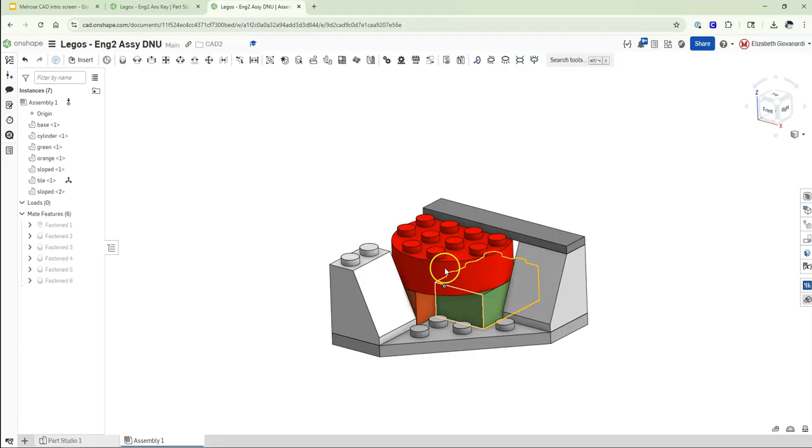Okay, so this is the first part of the video that's going to show you how to assemble your Legos, which is part of the assignment that looks like this. So this is part of the assignment from last year in CAD 1 when you had to just do the part studio of these parts and it looked like this.

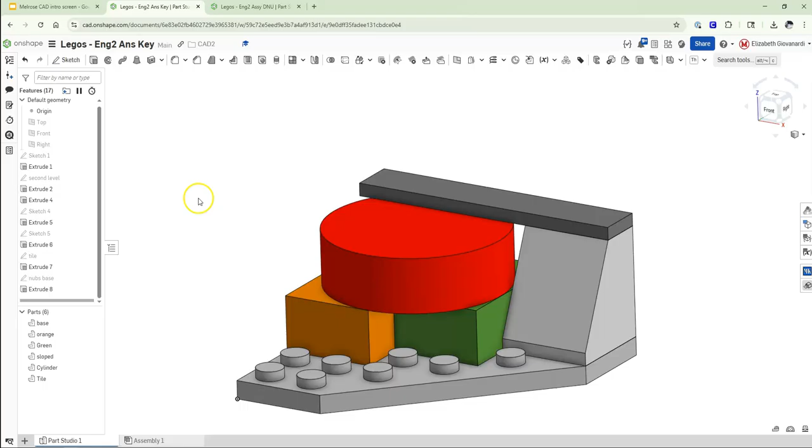And just to practice, last year you did add these studs to the top of each one of these parts, but just as a refresher, because it's been a long summer, we're going to add these studs to the top of the pieces because who wants Legos without the studs? That won't work. I'm going to turn off the parts on top just so that you can see that better.

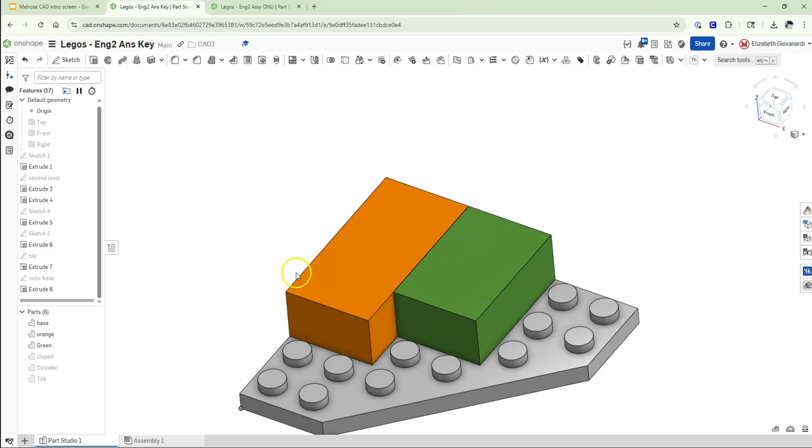All right, so the first thing we're going to want to do is create a sketch up on this top plane. So there's our sketch, and now I'm actually going to hide those two parts because what I want to do is use the use tool to bring those circles up onto my current sketch plane. So if I click, this is the use tool, and it just basically projects geometry from existing parts up onto wherever your sketch plane is.

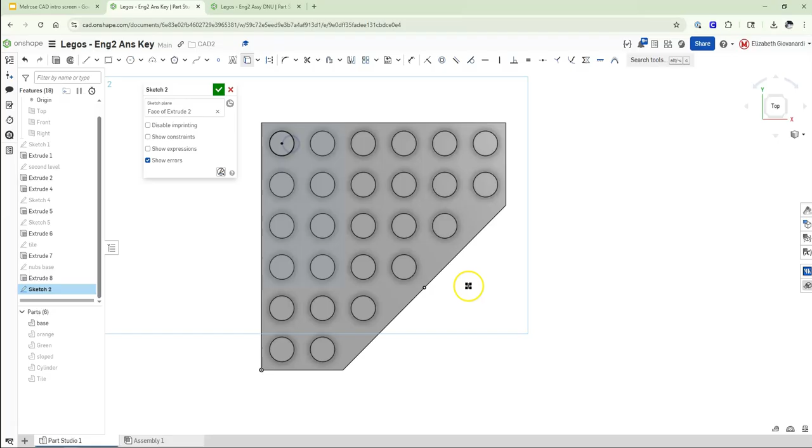So if I do that, you'll see there's now a black circle. But what I think really shows you that is when I do this. You'll see that this is now putting that circle up onto that sketch plane. So if I do it from this view, you're going to see how those get projected up onto our existing sketch plane. And I'm going to do this for every one of the circles. It's going to be on either the orange or the green piece.

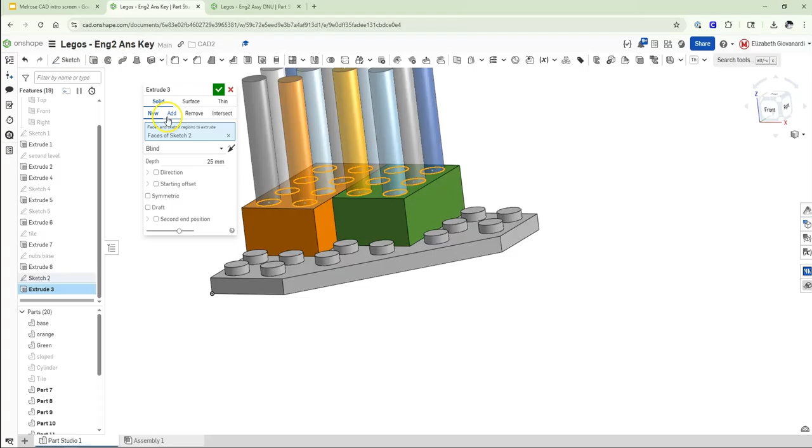And so now there's our sketch, but what I'm going to do is I'm going to turn those parts back on and now use the extrude tool, which you should remember, and I'm going to pick this whole sketch, and now I'm going to say, rather than new, because I don't want all of these to be new, I want to add those studs to the existing orange and green part.

So what I'm going to say is add, but now it's mad, right? It shows red. Anytime you see red in CAD, that means the program's mad at you. And it's saying, I don't know what you want me to add that to. That's because it needs me to say, I want you to add it to orange and to green. And now it's much happier.

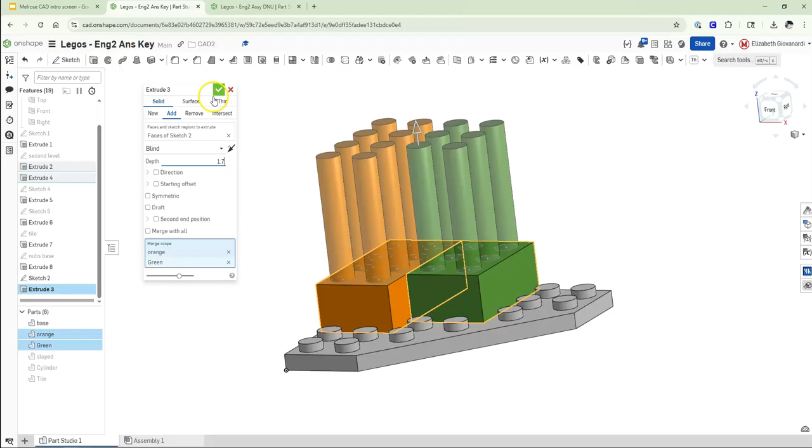Now those studs are obviously too tall. If you remember back from CAD 1, which I'm guessing you don't remember from the summer, the depth or the height of those studs is 1.7 millimeters. So I'm going to green check that, and now that looks great.

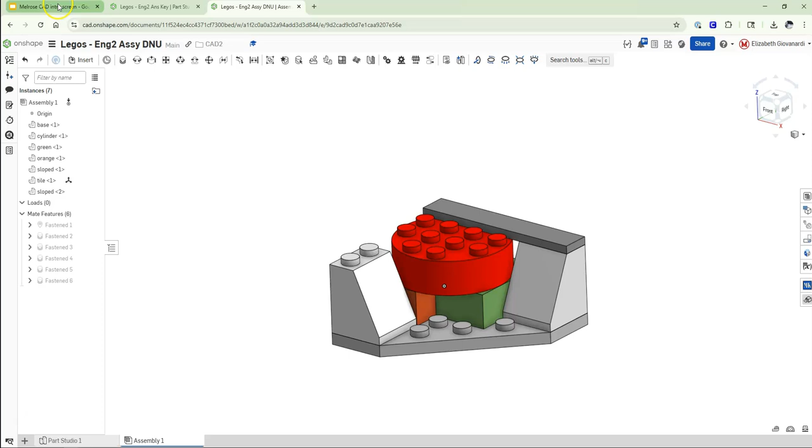I'm going to take a break and let you do that to all of the pieces except for this tile. The tile is one that's just a flat top, like I showed you in the assembly. This is what it's going to look like in the end. Actually, your assembly is going to have an extra little slope piece over here, but you don't have that right now, and we'll get to that in the assembly part. So far, all we've done is the union and the merge scope. Come back, and I'll show you the Boolean subtraction.